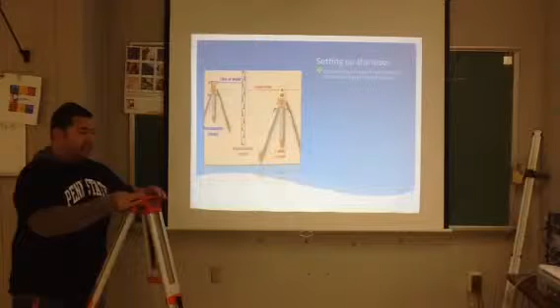So getting right into setting up our laser, the first thing we're going to do is spread the legs of a tripod. I've already done that, getting it at face level. I don't have to have this real accurate, for reasons you'll see momentarily.

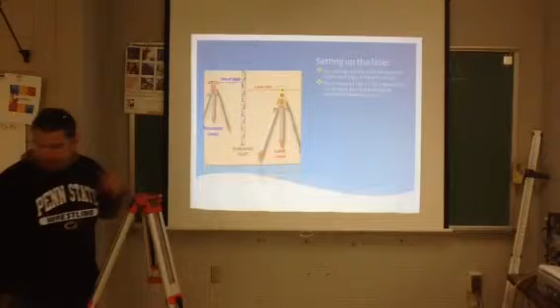Next we're going to place the laser on top of the tripod and screw it in. This is the laser level base itself, and we'll take this and just screw it right in here.

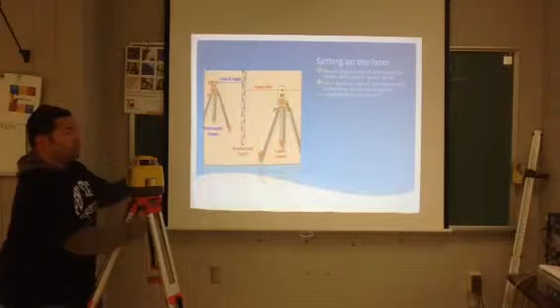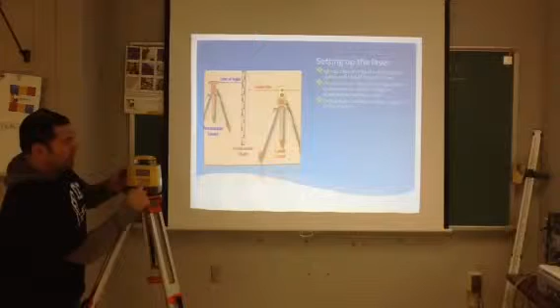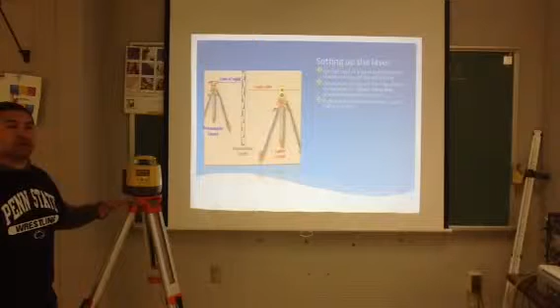Now, we do want our laser to be level, but the wonderful thing about this laser is that all we have to do is push this button, our power button, and the laser will self-level itself. Right now it's going through the leveling process, and as long as we're kind of eyeball close on our tripod, the laser will take care of the rest.

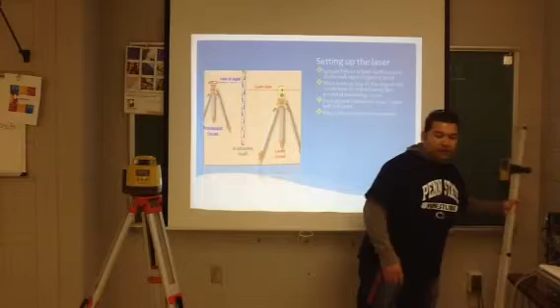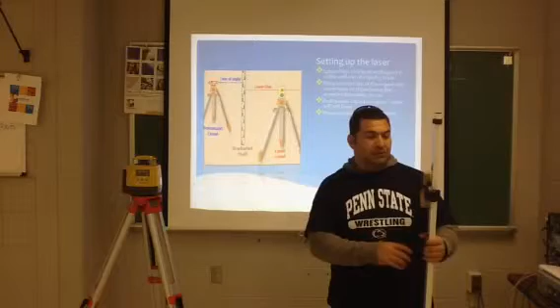Next we'll take our sight rod and put it on a specific point. To get my reference point, I would choose a point on the land where I want everything to be leveled in according to that, plus or minus. So I've got my sight rod here, and I've got my receiver that's already on there.

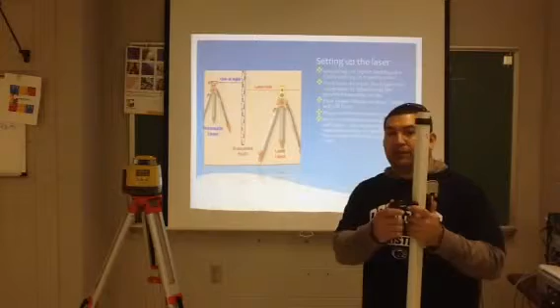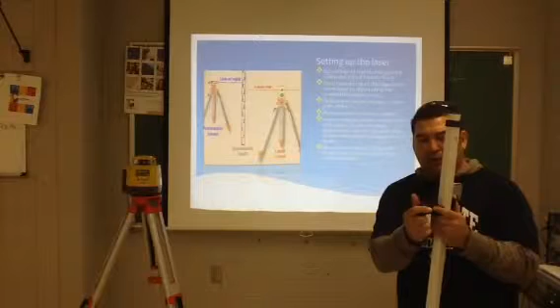I'm going to move my receiver up and down until it reads that it's level on the receiver, and it will let me know that. There will be visual and audio cues to let me know if this is level or not. They're pretty identifiable, as you'll see. I have it on the quietest setting right now.

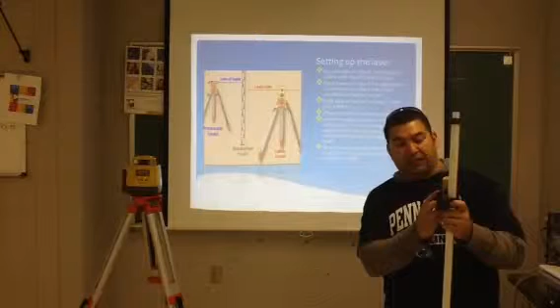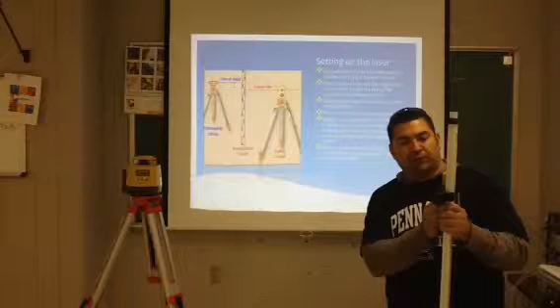Right now, visually, it's telling me to go up. There's an arrow on the visual reader. If I were going too high, there would be an arrow telling me I need to come down. And then once I get a straight tone, then I've found my reference spot.

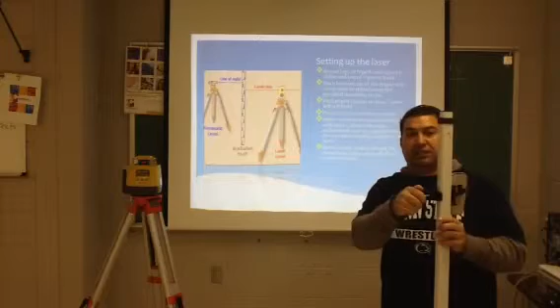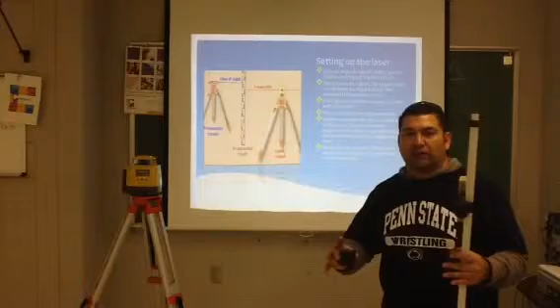Now depending on where you want that reference spot, that's where you would set that initially. Everything we have in relation to that will either be above it or below it. So after we do all that, we'll move to the next point to plot our grid or find out what kind of slope we have, but it's all relative to that reference point.

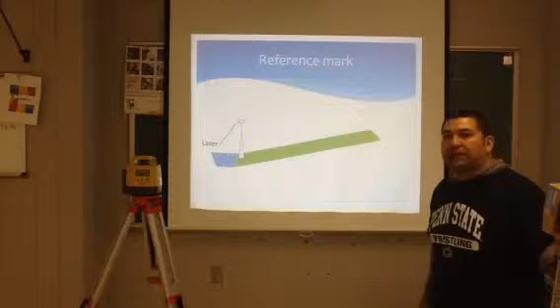This is just another illustration of the same thing we just did. We would set our laser, and the height of the laser really doesn't make much difference, because when I put my sight rod down with my receiver on it, this is where I'll find my reference point, and it has to deal with where the location is on the ground.

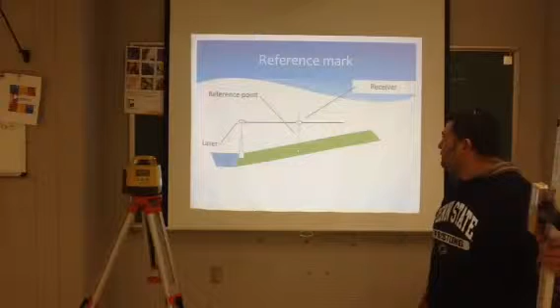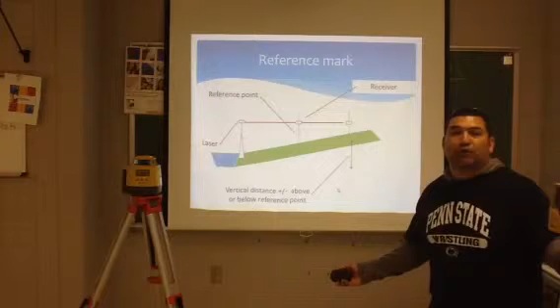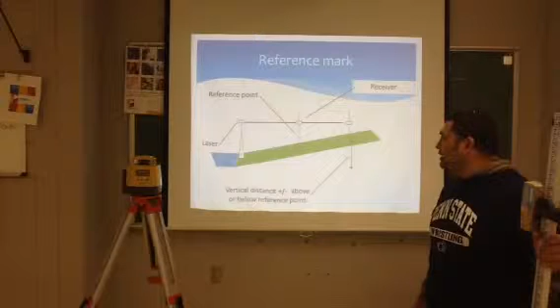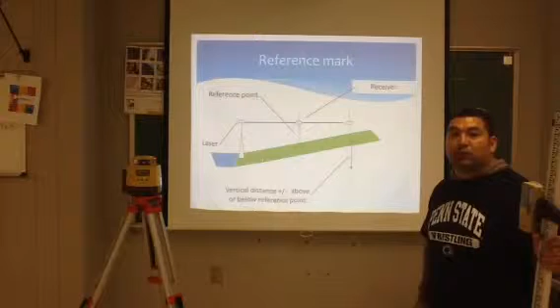For every point that I plot after that, it will be a vertical distance of either plus or minus whatever your measurement is. So for instance, if this point were to sit 2 feet higher, it would just be noted as plus 2 feet. And in retrospect, if the next point were to be plotted downhill from this, it could actually be a negative number.

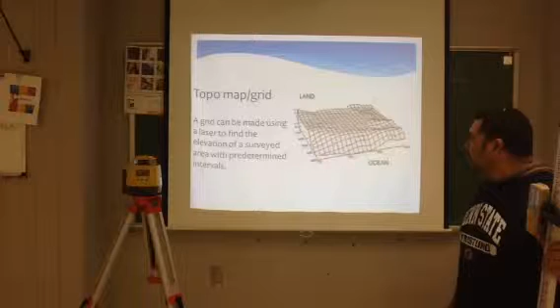So if it's set down -2 feet from it, you would just notate that the next point was -2 feet. Now we're going to make a small topo grid, or topo map. It allows us to see a certain plot of land and the difference in elevation relevant to a certain point that we'll pick. On the worksheet provided, we're going to show you what we're doing here.

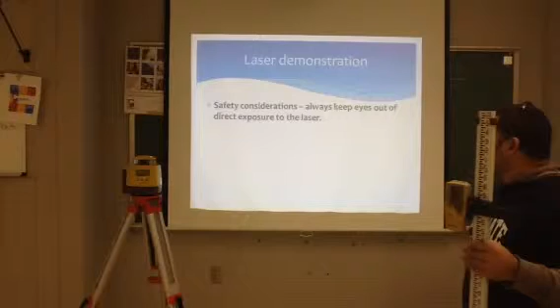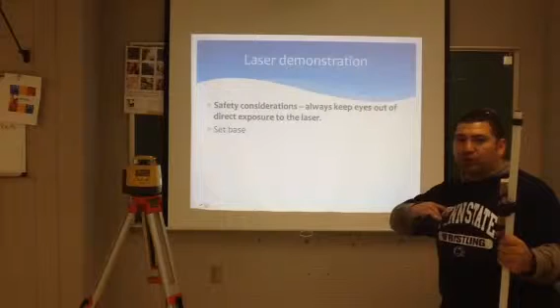Always be safe whenever you're using your laser. It's not that dangerous of a tool, it's not a power tool, but there is the potential for direct exposure to the laser in your eyes. So you never ever want to look directly at the laser. It's okay to be above it or below it, but you always want to make sure your eyesight is above or below, not directly across from the laser.

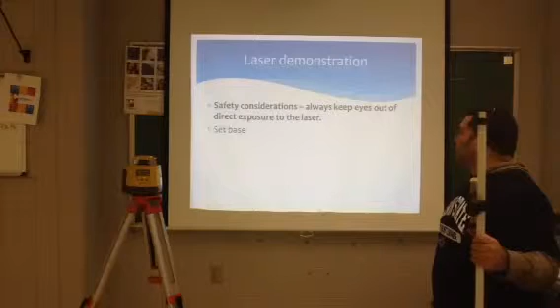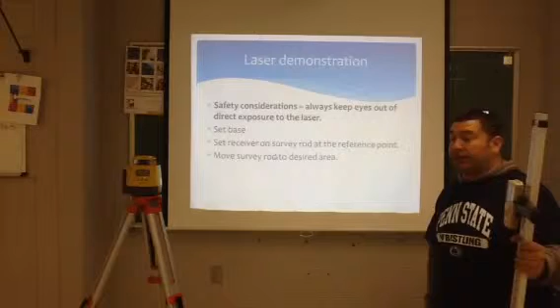We've set our base, we've set the receiver on the survey rod at the reference point. We move our survey rod to a desired area, then move our receiver up and down in order to find our reference point, and repeat in a grid pattern. After we found our reference point, we'll repeat it in a grid pattern.

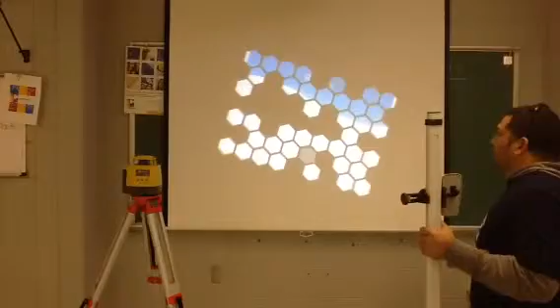So what we're going to do now is actually make a topo map. What I have set up here is 9 quadrants. Going from top to bottom, left to right, this will be quadrant 1, quadrant 2, quadrant 3, quadrant 4, quadrant 5, 6, and so on.

Our reference point is going to be quadrant 9. So we'll start on quadrant 9. Starting on quadrant 9, I will get my measurement. Now I've gotten my measurement and found that reference point.

So when we move to another quadrant to check the measurement against it, we would notate that difference. In this case, what I've done with the students, so they can touch and feel the measurement, is use it in measurement of books. So in quadrant 1, after they level it, they can see that quadrant 1 would be +2 books. If this was 1 book, everything is set to this reference point, so this would be +2 books.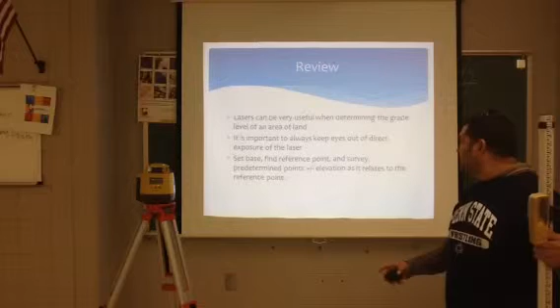Set the base, find the reference point, survey predetermined points, and note plus or minus elevation as it relates to the reference point. So after I found my reference point, everything will be above or below that. That's it. Thank you.